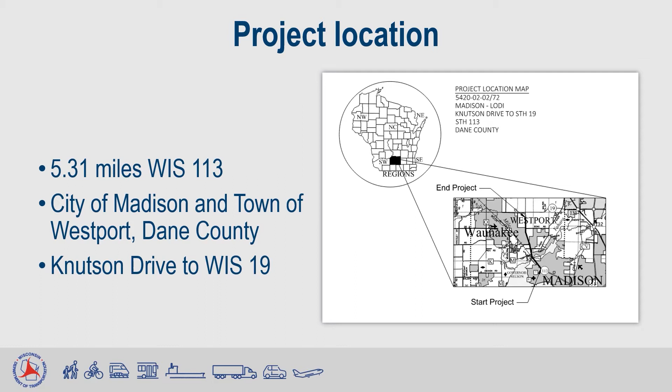The proposed project along 5.31 miles of Highway 113 in Dane County begins at Knutson Drive in the city of Madison and ends at Highway 19 in the town of Westport.

One reason this project is needed is the extent of pavement deterioration along Highway 113. The existing asphaltic pavement has significant longitudinal cracking and heaving. This pavement deterioration not only looks bad, but also causes Highway 113 to have poor ride quality. The roadway was last serviced in 2004.

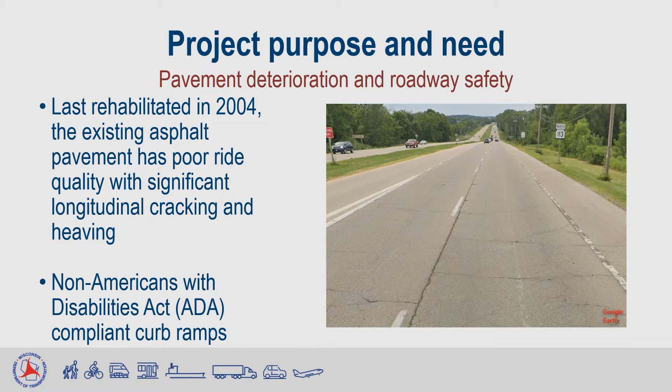This project is also needed to upgrade curb ramps at the County M intersection to meet Americans with Disabilities Act standards. Another purpose is to address safety in operations at the Highway 113 intersection with Arboretum Drive and Bong Road.

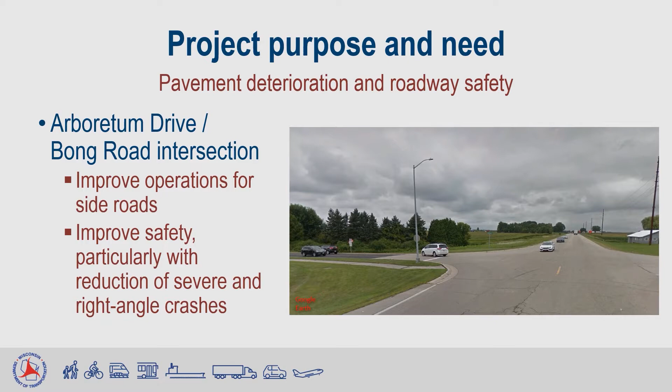Vehicles on Arboretum Drive and Bong Road also experience delay and queuing, especially during morning and evening peak hours. With minimal gaps resulting from high peak hour traffic volumes, drivers on Arboretum Drive and Bong Road may be tempted to make higher risk decisions to turn onto Highway 113.

The Highway 113 intersection with Arboretum Drive and Bong Road has demonstrated a history of severe crashes. Between 2015 and 2019, 15 crashes were recorded at the intersection, 13 of which resulted in injuries. The majority of the crashes were rear-end crashes with Highway 113 northbound or southbound left-turning vehicles, and right-angle crashes.

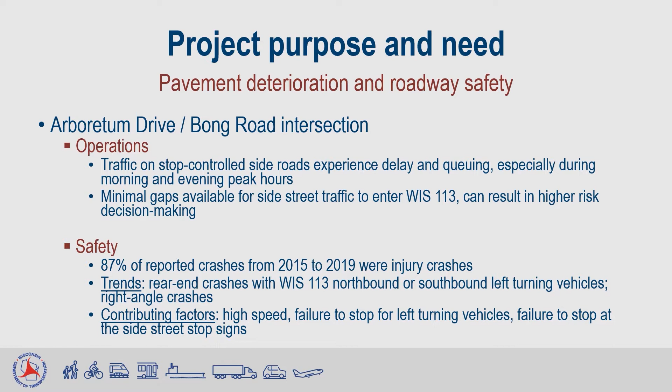Contributing factors for the crashes include high speeds on Highway 113, failure to stop for left-turning vehicles, and failure to stop at the side street stop sign.

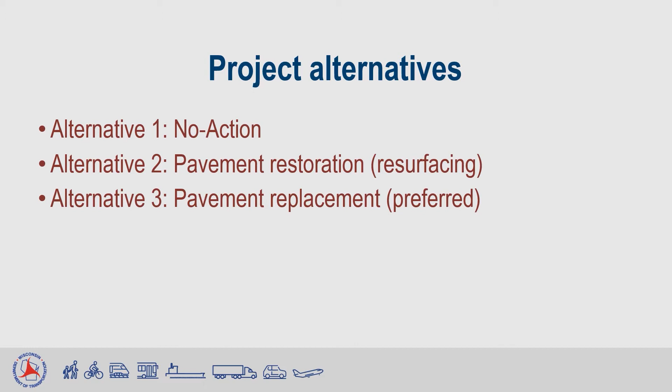The alternatives the project team investigated are no action on Highway 113, pavement resurfacing, and pavement replacement. The first alternative is no action. If no improvements are completed, the roadway pavement will continue to deteriorate and safety conditions may deteriorate as traffic grows, leading to pavement failure. A no action alternative will not address the identified needs and is not preferred.

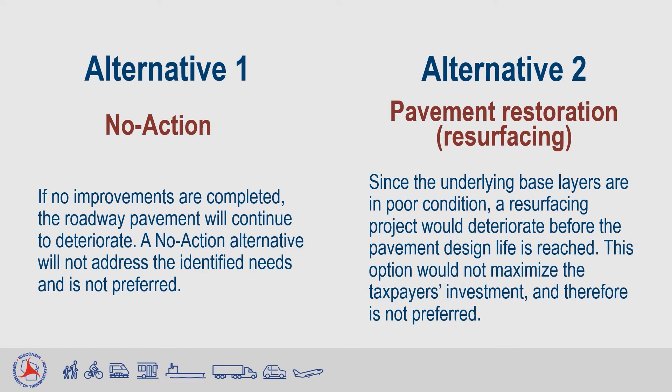A pavement restoration or resurfacing option would consist of milling the existing pavement and overlaying with a new asphalt pavement surface. Since the underlying base layers are in poor condition, a resurfacing project would deteriorate before the pavement design life is reached. This option would not maximize the taxpayer's investment and is therefore not preferred.

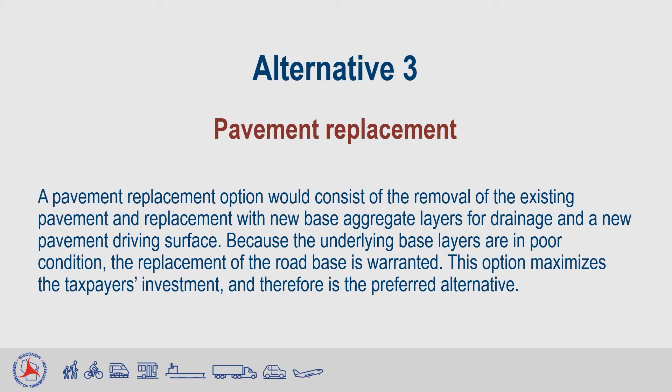The final alternative is a pavement replacement project. This option would consist of the removal of the existing asphalt pavement and underlying aggregate road base and replace it with new base aggregate layers for drainage and a new pavement driving surface. Because the underlying base layers are in poor condition, the replacement of the road base is warranted. This option maximizes the taxpayer's investment and is therefore the preferred alternative.

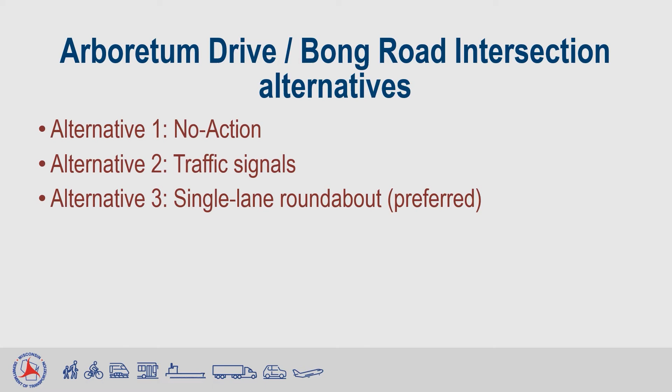The project team also completed a study which reviewed 3 alternatives to address the project's safety and traffic operation needs at the Highway 113 intersection with Arboretum Drive and Bong Road.

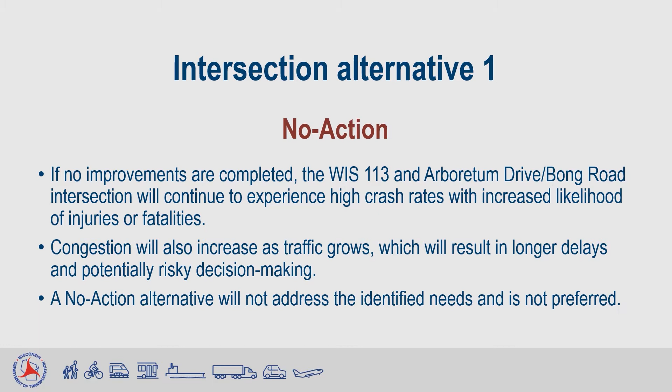The first intersection alternative is no action. If no improvements are completed, the Highway 113 and Arboretum Drive Bong Road intersection will continue to experience high crash rates with increased likelihood of injuries or fatalities. Congestion will also increase as traffic grows, which will result in longer delays and potential risky decision-making. A no-action alternative will not address the identified needs and is not preferred.

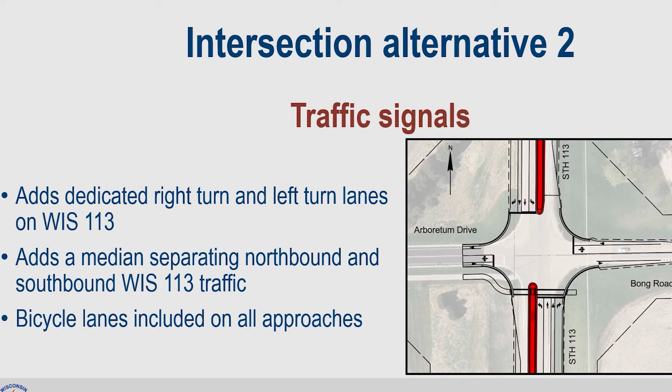The second intersection alternative would be to add traffic signals. With the traffic signals, it would add dedicated right and left turn lanes on Highway 113. The side roads would maintain 1 lane. It would also include a median to separate northbound and southbound Highway 113 traffic, as well as a bicycle lane at all 4 approaches. Safety performance is predicted to improve with a traffic signal compared to existing conditions.

However, due to high speeds on Highway 113, the severity of crashes could still be high. The traffic operations, especially on the side road approaches, are also expected to be improved over existing conditions, but queue lengths are expected to be longer during peak periods compared to the roundabout alternative.

The estimated construction cost is higher than the roundabout alternative due to extensive approach work needed for the new turn lanes. This option would not maximize the taxpayer's investment and is therefore not preferred.

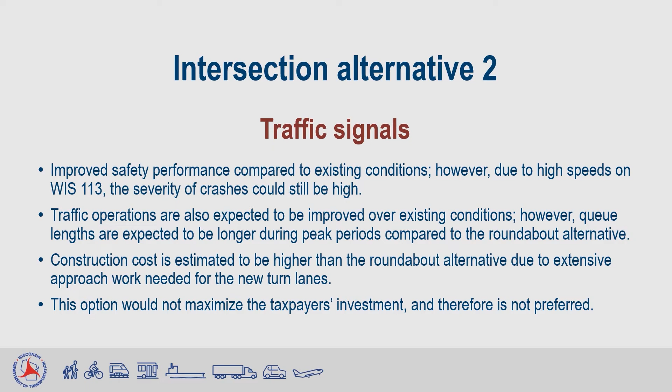The last intersection alternative is a single-lane roundabout. This would include single-lane entries with a bicycle ramp connecting to Arboretum Drive and a crosswalk on the south leg of Highway 113. With roundabouts, the typical crash severity is reduced because they eliminate T-bone crashes.

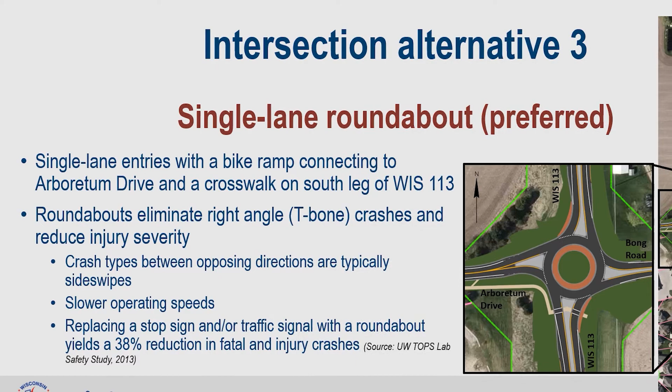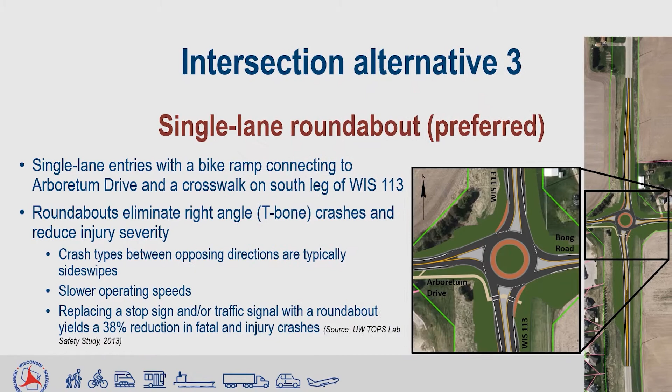The crash type between opposing directions are typically less severe side swipes. Also, the geometry of the roundabout results in lower operating speeds for drivers. Replacing a stop sign and/or traffic signals with a roundabout yields a 38% reduction in fatal and injury crashes.

The roundabout is predicted to have improved safety performance compared to existing conditions and less severe crashes compared to the traffic signal alternative. Traffic operations are also expected to be improved over existing conditions, with less queuing than the traffic signal alternative and less off-peak delay. Construction cost is estimated to be lower than the traffic signal alternative. This option maximizes the taxpayer's investment and is therefore the preferred alternative.

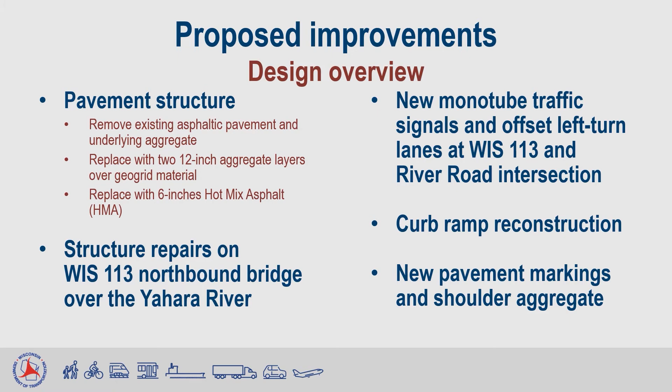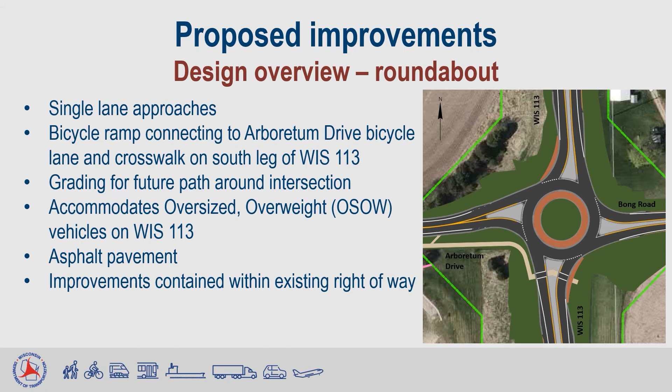The proposed single-lane roundabout improvements include single-lane approaches, a bike ramp connecting to the Arboretum Drive bike lane, and a crosswalk on the south leg of Highway 113. Along with this, the grading for a future path around the entire roundabout will be included. The roundabout design will accommodate oversized and overweight (OSOW) vehicles. All improvements at this intersection will be contained within the existing right-of-way.

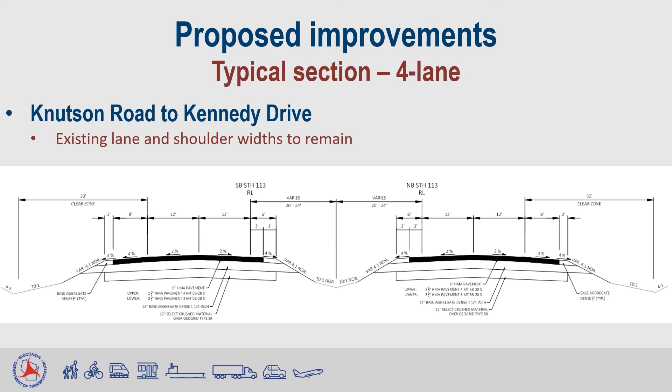This drawing shows the proposed typical section for the 4-lane divided section of Highway 113. This segment, from Knutson Drive to Kennedy Drive, will keep the existing lane and shoulder widths, along with new aggregate and hot mix asphalt layers.

Like the 4-lane section, the typical 2-lane section of Highway 113 will keep the existing lane and shoulder widths with the proposed pavement structure. This segment is from Kennedy Drive to the proposed roundabout, and from the proposed roundabout to Highway 19.

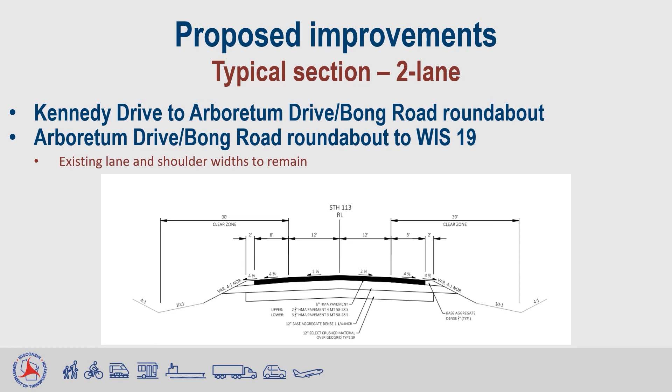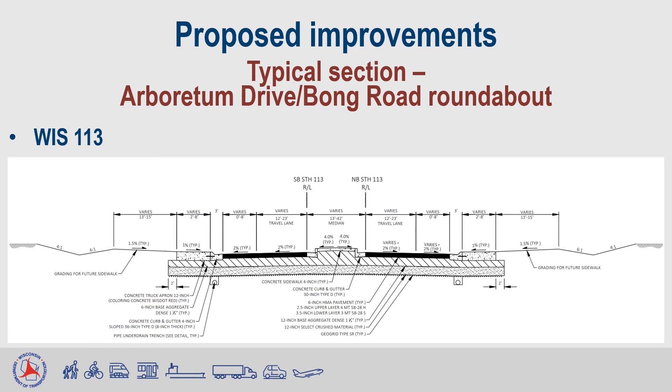This proposed typical section shows the typical approaches of Highway 113 at the proposed single-lane roundabout. Along with the same pavement structure described in the other segments, this section will also include curb and gutter, concrete median, pipe under drain, storm sewer, concrete truck apron, ditch grading for drainage, and grading for a future sidewalk.

The last proposed typical section is the Arboretum Drive and Bong Road approaches to the single-lane roundabout. Included is the proposed pavement structure, concrete curb and gutter, concrete median, pipe under drain, concrete sidewalk south of the Arboretum Drive approaches, and grading for future sidewalk at all other approaches, and also ditch grading for drainage.

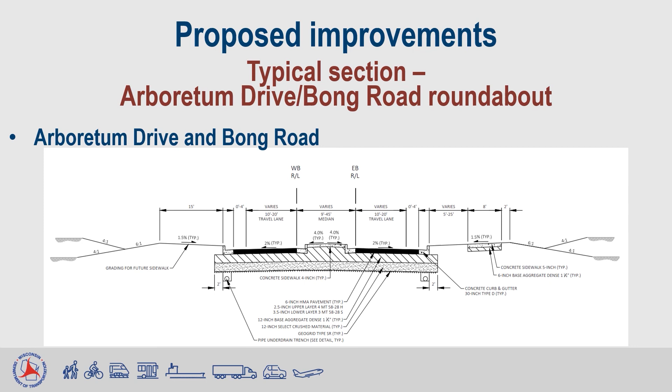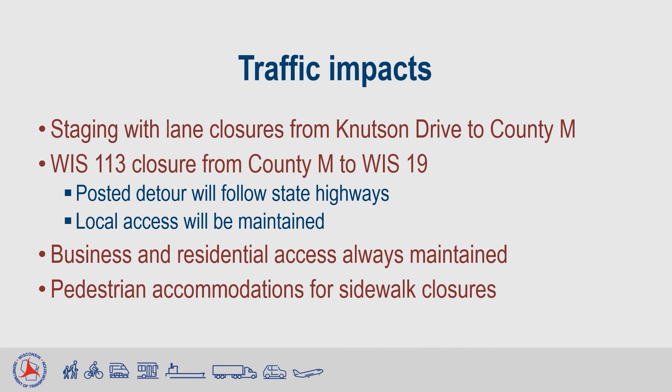The traffic impacts during construction will include staging with lane closures from Knutson Drive to County M. From County M to Highway 19, there will be a total road closure with a state highway detour. Local access will be maintained. Business and residential access, as well as pedestrian accommodations, will also be maintained for the duration of the project.